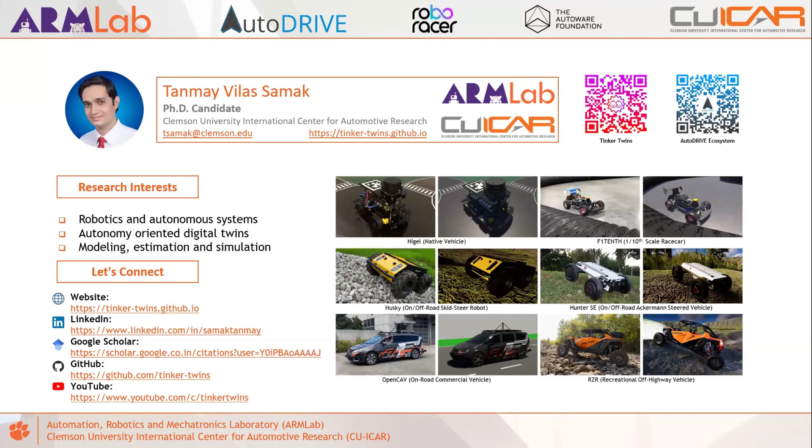Our PhD research is targeting digital twins, no pun intended, where I am focusing on the real to sim aspect. Whatever is in the real world, how do you model it, estimate, and then bring it in simulation reliably? And Chinmay is working on the other side of the coin to ensure whatever works in simulation can be transferred with guarantees back to the real world.

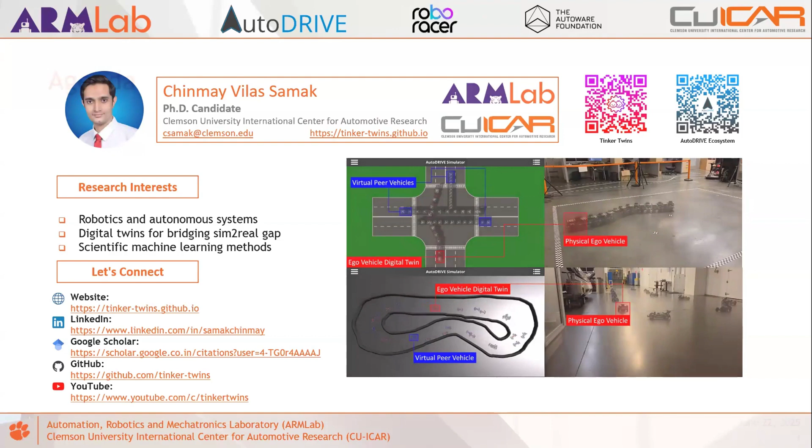So in today's agenda, we'll be first going over the introduction of what AutoDRIVE ecosystem is and how it enables research and education. We'll be then talking about some exciting competitions realized by AutoDRIVE. Most of the talking today will be about AutoDRIVE AutoWare integration, where we'll be highlighting some of the key aspects and demos that we have curated. Followed by that, we'll have a step-by-step tutorial on how you can get started with AutoDRIVE and AutoWare today. And then at the end, we have some exciting unveiling to do. I won't, of course, talk about it now to save the fun for the last.

You have different vehicles. These can be physical vehicles as depicted in the first and third column of the picture in the top left, or they could be the digital twins of the same that is depicted in the second and fourth column. So we have different scales and operational design domains that AutoDRIVE can support. So for example, you have small scale vehicles like Nigel, which is the native vehicle of AutoDRIVE, as well as F1TENTH, both of these being open source.

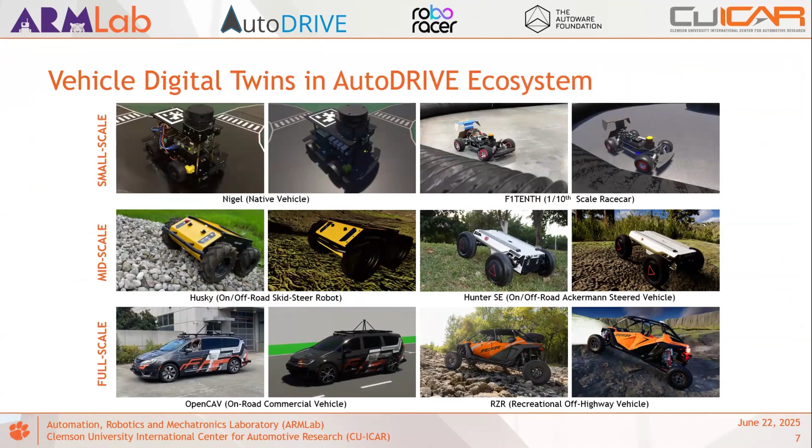So here is a glimpse of, or a zoomed in version of, the different digital twins that AutoDRIVE supports. And here you can see them in action, where you have the different scales of vehicle dynamics being simulated differently for each vehicle. Now, for example, small scale vehicles generally have very basic powertrain components, a motor connected by some gears directly to the wheels. But as you go towards full scale vehicles, you have very detailed powertrains. The same applies to other aspects of vehicle dynamics like the suspension geometry and things as such.

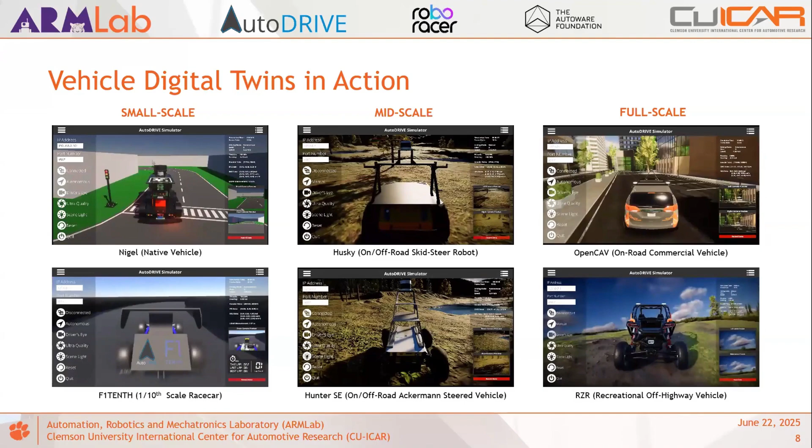Apart from that, the sensor suite also changes. So on the smaller scale vehicles, you have sensors that are typically hobby grade or general purpose academic grade sensors. But as you move to mid scale robots, you now have a mix of both hobby grade sensors as well as industry grade sensors. But typically, when you translate to full scale vehicles, you now have the complete sensor suite comprised of industrial grade components. And these now have been replicated to the digital twins so that the development of algorithms can be targeted accordingly.

Coming to environment digital twins, again, here is a zoomed in version of the different environments that I just discussed. So we have different synthetically constructed environments for small scale vehicles, typically like boxes or vinyl stickers, or in the case of F1TENTH or RoboRacer racetracks, the air ducts. One of the environments, the tiny town, is something that we have kept for benchmarking across different scales. And it is basically the scaled up or down version of the same environment across the different scales that you see. Apart from that, yes, you have different mid-scale as well as full-scale environments.

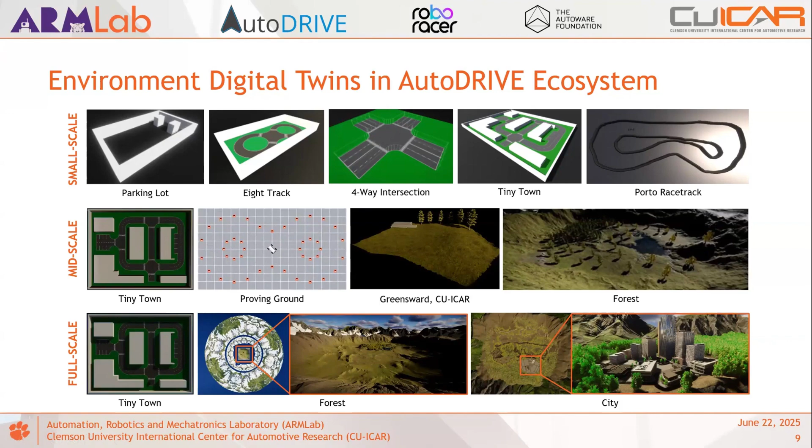Full-scale environments are typically more diverse in terms of their features so that users can target different styles of autonomous driving or different applications of autonomous driving in general. But static environments are themselves not enough. So we have, of course, the option of introducing variability in terms of dynamically changing the times of the day, the weather conditions, or other aspects of the scenario.

What you see on the right video is basically a test matrix that procedurally generates and simulates different times of the day. So the top two rows here are going from dawn to dusk to midnight. And the bottom two rows are showing the different procedurally generated weather effects from clear skies to overcast, foggy weather, rain, as well as snowfall.

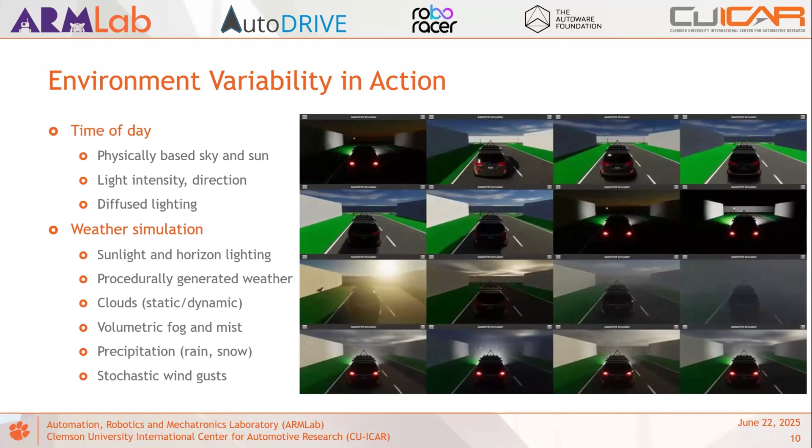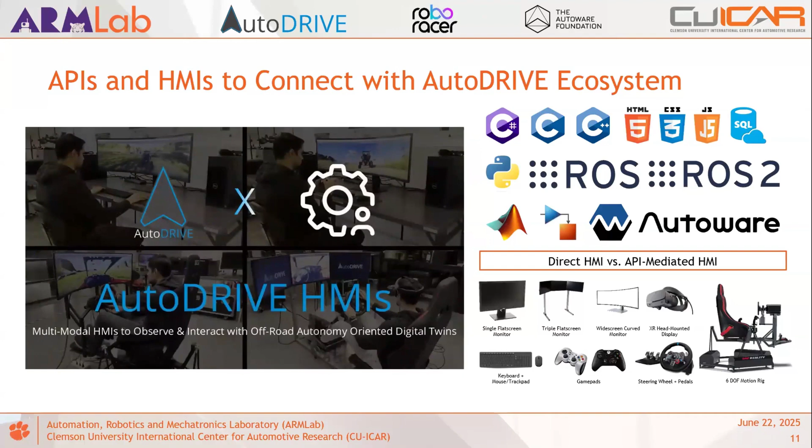But simulating alone is not sufficient. So you, of course, have the most critical aspect of connecting the digital twin ecosystem with a development framework. And that's what the APIs and HMIs are for. APIs are typically targeted towards autonomous driving applications where, as you see, we have a different suite of APIs that we support. And these will be primarily used for developing the autonomous driving algorithms and interfacing them in real time with the simulator. HMIs are primarily targeted for human in the loop testing and development.

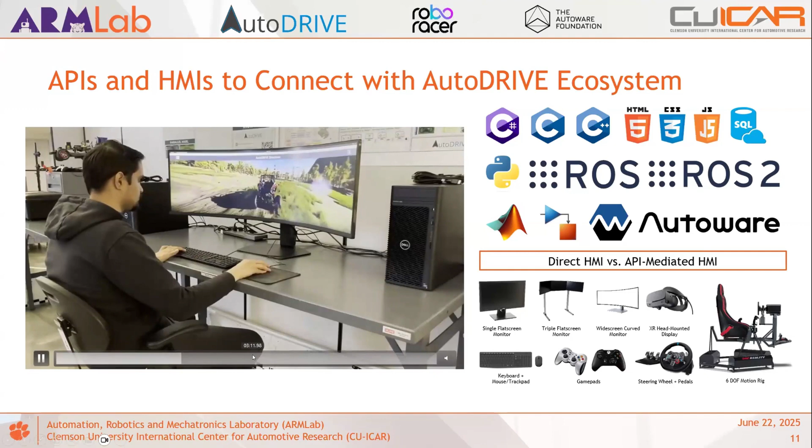And this can be now mixed and matched as well so as to create a mix of autonomous driving and manually driving aided scenarios where you have mixed traffic participants, enabling research or development in those operational design domains.

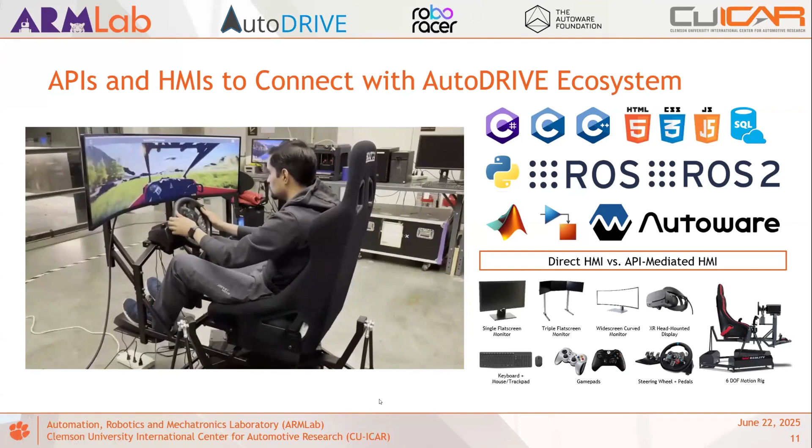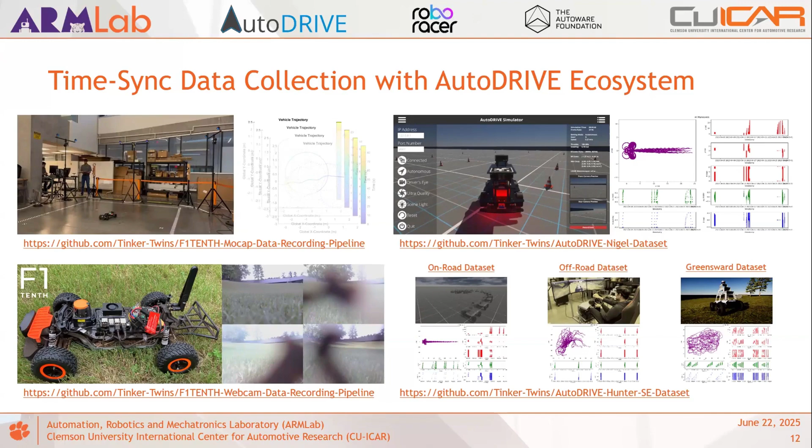Apart from that, we have also released a few data sets using the AutoDRIVE ecosystem. These are both from the real world as well as the digital twin of the same vehicles. And the one thing that I would like to highlight here is that all of these have been time synchronized from a data generation perspective so that not only perception data, but the dynamics data of the vehicles is also usable and could lead to, say, for example, deriving surrogate models for different motion planning applications or even control synthesis.

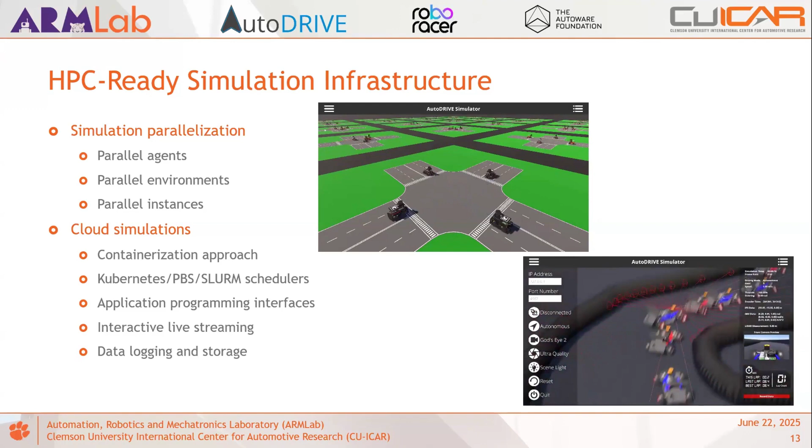One of the key aspects of digital twins is being able to accelerate them, and that's what is supported through the HPC-ready simulation infrastructure, where we have different ways of parallelization. Some of them are, as you see, agent parallelization and environment parallelization, where, for example, you could parallelize different environments or agents and isolate them from each other and then scale those deployments.

But apart from that, you also have instance parallelization, where you could spawn multiple instances of the simulation itself, which typically isolates the different variables and vehicle dynamics aspects. And these could be, for example, done in different ways. So here, for example, we have one of the works where we used Docker containers and Kubernetes orchestration using the Rancher cluster to orchestrate parallelized simulation workloads within cloud infrastructure.

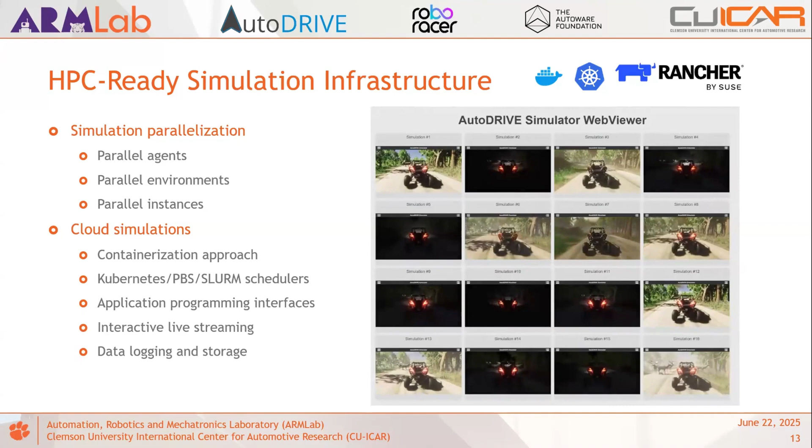And here is another representative use case where instead of using Rancher, we now adopted our university's Palmetto cluster using Apptainer as the means of containerization. And here we could now scale the deployments significantly from just 16 parallel instances all the way up to 32 or even 128 parallel instances.

Coming back to digital twins, here we are showing how one could use AutoDRIVE ecosystem to immerse physical full-scale vehicles in the loop with their digital twins, and support different scales of immersion of the physical vehicle within the digital space.

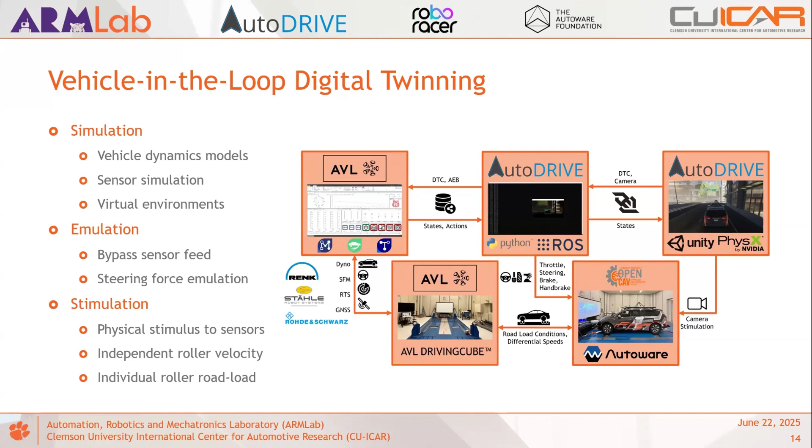So here is a quick glimpse of how it looks. Again, to reiterate, for example, we have the projectors mounted on the windshield of the vehicle that's projecting live feed from the digital space in the front of the vehicle. The physical cameras on board the vehicle are capturing the projected feed and making the autonomous driving algorithm think as if it's immersed in the digital space.

The physical vehicle is then controlled using the autonomous driving software stack that's running on board the physical vehicle. Here, for example, we are using Autoware as the validation stack for our experiments, and running a test case of autonomous emergency braking. And as you see, the physical control commands are being relayed in the real world, and the chassis dyno is now making the measurements to feed and close the loop with the digital twin of the vehicle to update the vehicle dynamics within the simulation space. And that now closes the loop to update the projection feed in front of the vehicle.

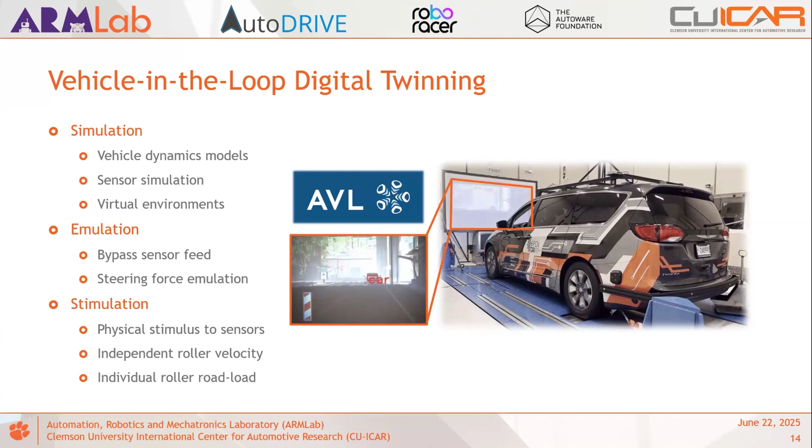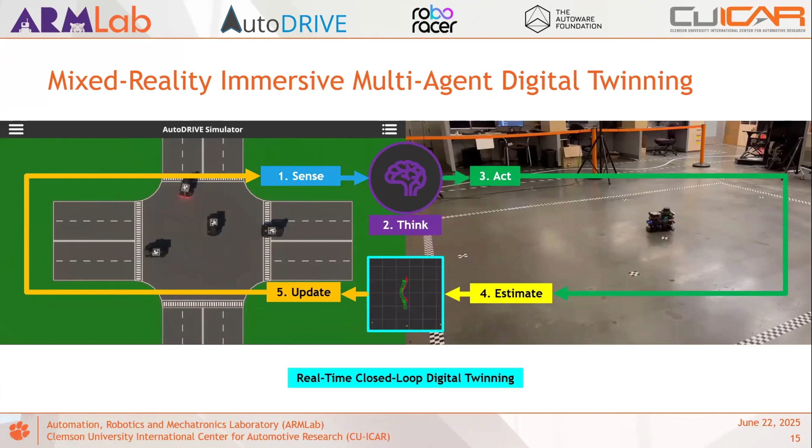But this is just single agent vehicle-in-the-loop digital twinning. You can now also start exploring interesting use cases from a multi-agent digital twinning perspective, and not just pure digital twinning, but mixed reality digital twinning, where, for example, what you see here is only one physical vehicle running in the environment compared to three peer agents and a virtual scenario set up within the digital space that now synchronously performs a multi-agent intersection traversal task. And you can, of course, scale these across different ODDs and operational scales.

So for example, in the matrix that you see here, the first row represents the test bed, which is the real world. You can have one or more vehicles in the real world, depending on the use case. The state estimation from these is now being done using the dev kit, where, for example, you have onboard state estimation algorithms from small scale vehicles, such as LiDAR-based range flow odometry, inertial encoder odometry, as well as full factorial 3D point cloud based localization that's now estimating different states of the vehicle. And then these states are being updated within the digital space to synchronize their digital twins within the virtual environments.

And you, for example, have three different use cases. First, for intersection traversal, where you have three other agents co-participating within the same virtual environment. You have an autonomous racing use case where a digital entity of a RoboRacer vehicle that's completely virtual is immersed in the loop with the physical vehicle that you see above.

And finally, for OpenCAV, you have a jump scare scenario where a virtual vehicle is cutting in front of it without any warning, and the digital twin has to sense it and then relay the same action commands within the physical space to make sure that the emergency braking is not only happening from the perception side, but actually even within the real world, you have the full factorial test plan that now makes sure that the braking distance is safe and optimum.

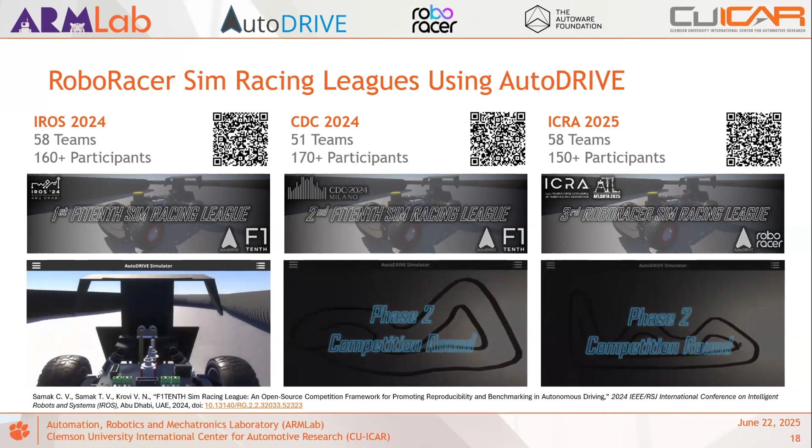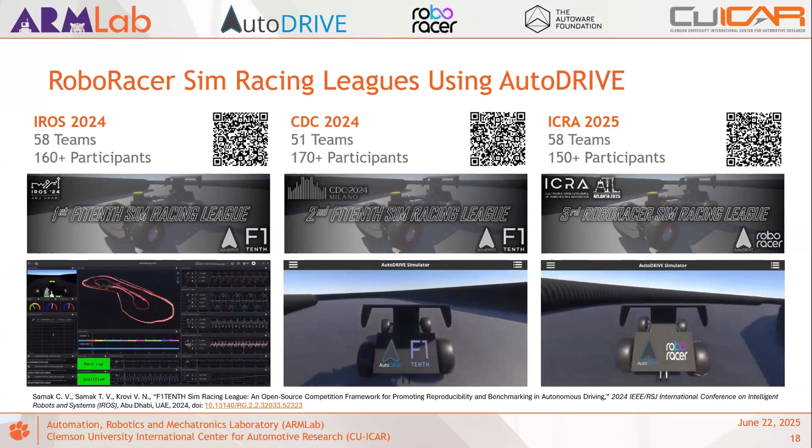So the sim racing leagues were typically held a week ahead of the actual conference so that the teams could participate in the sim racing leagues ahead of time and then go to the conference and participate in the physical racing league. And we also saw some really interesting algorithms as well as the sim to real transition of those aided by the digital twins to win the physical competitions as well.

So here is a typical representation of the participation response that we got. Specifically for ICRA 2025, which was the most recent competition held, we saw participation from over 150 people across 58 different teams representing 32 different organizations, at a global scale spanning over 25 countries. So it, in a way, validated the practicality and scalability of the competition deployments.

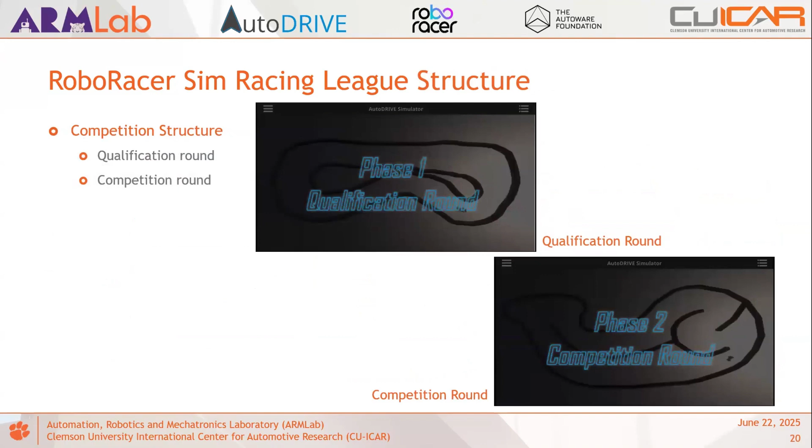But what is more important here is firstly to understand the competition structure. The structure here is what we believe helped us scale this to such a level. We divided the competition in two different phases. One was the qualification round, wherein we released Dockerized environments for the simulator as well as DevKit to all the teams approximately a month ahead of time.

And there was a set deadline for all the teams to submit their solutions for autonomous racing, which were then going to be evaluated for their ability to continuously run multiple laps around the track. And the only objective here was to be as safe as possible. So safety was most critical, performance was secondary.

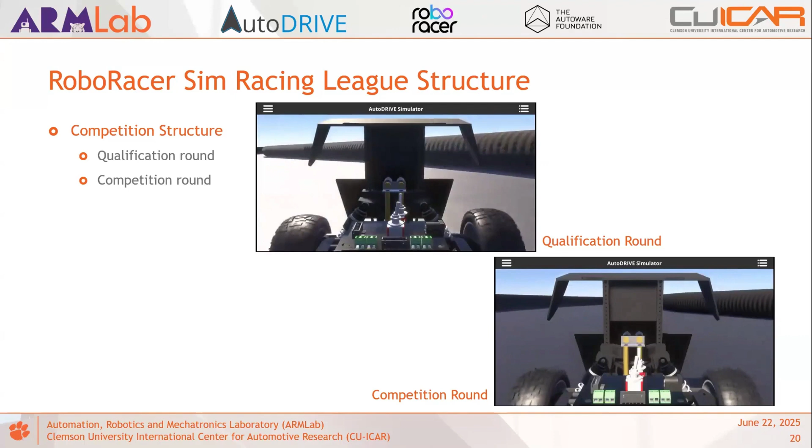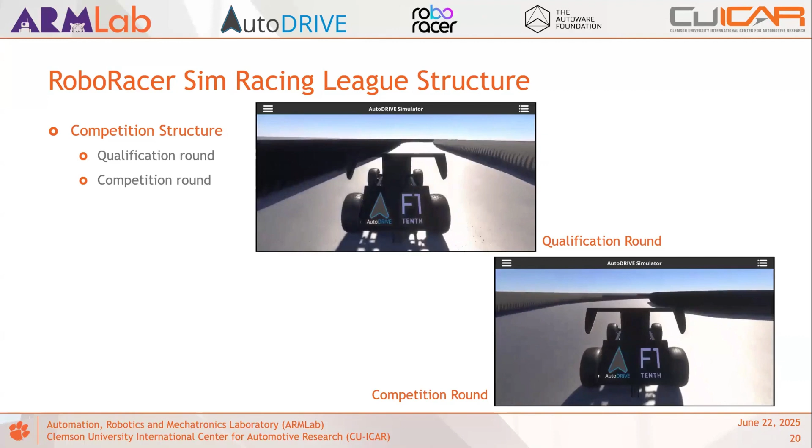But then in the competition round, just a few days ahead of the final deadline, we switched the track with another one, and we expected all the teams to slightly modify their algorithms or tune them for the new racetrack. And their algorithm should have already been robust enough to handle track changes and other changes in the environment. So here is how the competition framework looks.

What we have essentially adopted here as a best practice is containerization, in which we offer every team the containerized instance of the simulator as well as dev kit. And their job is to just work on this small aspect of developing their own package or packages that can interface with the AutoDRIVE API to communicate back and forth.

And the primary modality that we used for deploying these competitions is ROS2, which is directly scalable to the AutoWare stack. And so some of the teams have also started to use the AutoWare stack to develop their autonomous racing algorithms and have performed really well in the competition.

The other aspect in terms of global scaling is to understand that not everyone would have computational resources that are state of the art. So we offered the teams the option of distributed computing as well as GUI versus headless modes of computing to more efficiently develop their algorithms, and whatever solutions they could submit were still valid when we deployed and executed them.

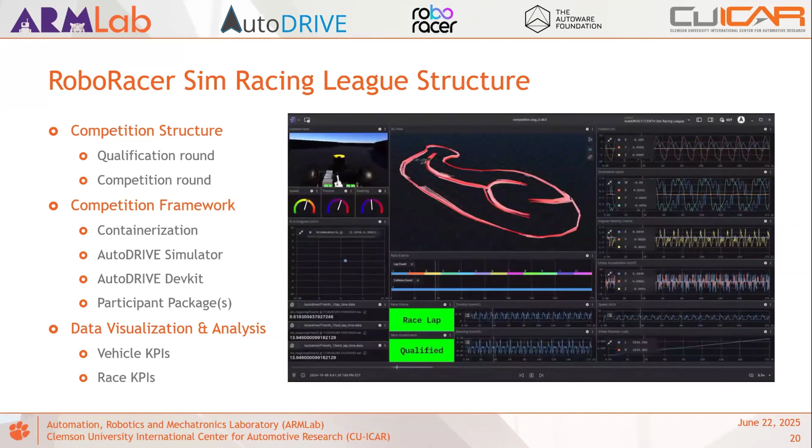The final aspect of this competition was to be able to transparently record all the key performance indicators for the vehicles as well as the race in general and provide this data back to the teams. And in addition to that, we now also have the capability to analyze this data, which is pretty detailed in terms of all of these different KPIs, as well as comment on the reproducibility and benchmarking aspects of the simulation and the testing of different autonomous racing or driving algorithms in general.

So with that introduction and overview of the AutoDRIVE ecosystem and its applications, let us now move to the specific topic of interest, which is its integration with the AutoWare stack.

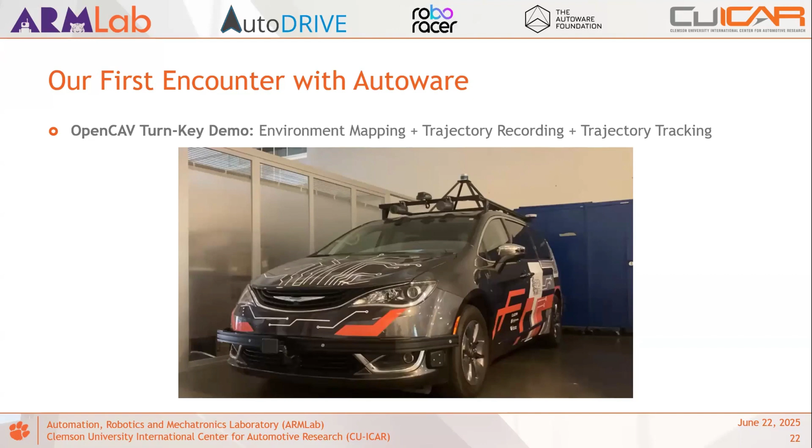The main reason or motivation we had for doing this was our first encounter with the Autoware stack when we started our PhD at CU-ICAR. We encountered this vehicle that is part of our lab, the Open Connected and Automated Vehicle, or OpenCAV. It is basically a Chrysler Pacifica retrofitted with sensors, drive-by-wire, and onboard compute, which can enable autonomous navigation.

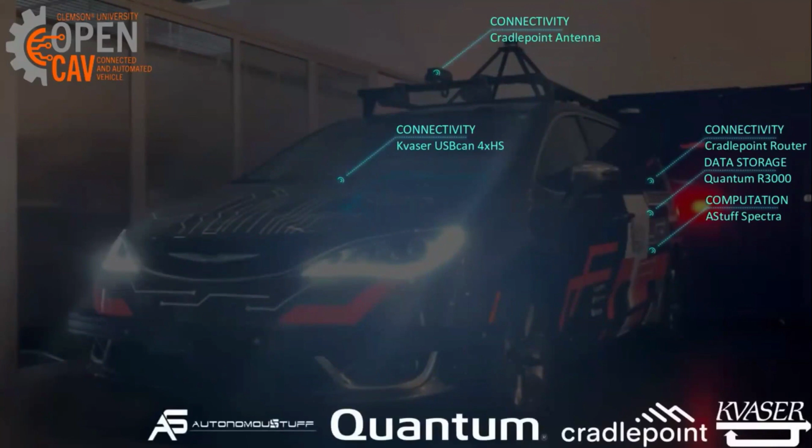Throughout the campus, we already have a pre-computed map of the campus environment, and we can use that map for localization. Once we have the localization estimates, we can then drive this vehicle around from point A to point B in the campus and record that trajectory, or do an online or offline trajectory planning to navigate from one point in campus to the other.

And with that plan, what we can do is offer autonomous shuttle rides for people from one point in the campus to another. So what you see currently in action in the video is the capability of the vehicle running the Autoware stack to map the environment, then generate the trajectory, and then track that trajectory in real time, all autonomously to navigate from one point on campus to the other.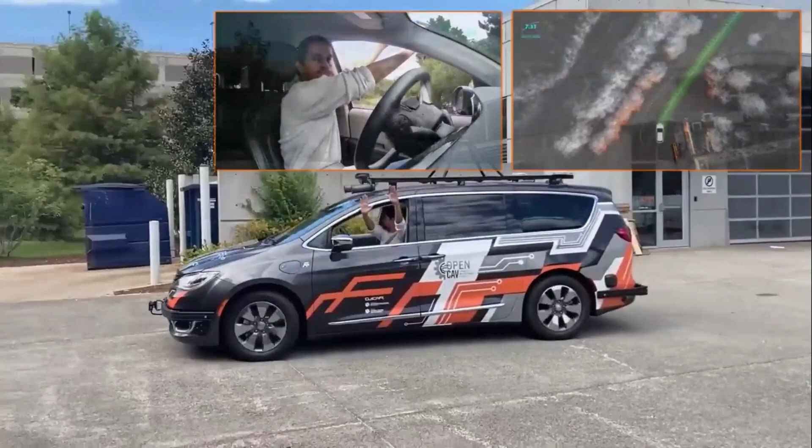But most critically, the deployment from simulation to reality should not have any changes, either in terms of the algorithm or even in terms of the interfaces. For example, the topics that the Autoware stack is publishing on, or the sensor streams, or other hardware-software integration aspects. And that's what was the key motivation, which firstly required a high fidelity digital twin of the OpenCAV, and secondly required the API for AutoDRIVE and Autoware to be integrated harmoniously so that the deployments from simulation to reality became seamless and zero shot.

Finally, once we had this working for the OpenCAV vehicle, we wanted to now have a uniform or unified pipeline or framework that can support deployment of a common autonomy stack such as Autoware across all the different scales and operational design domains of autonomous vehicles that we typically encounter during our research.

So as a result, with all the different digital twins that we have, we created a corresponding Autoware API for them so that they can be interfaced with the Autoware stack across small, mid, and full scale, while targeting different operational design domains like on-road navigation, autonomous racing, as well as off-road navigation.

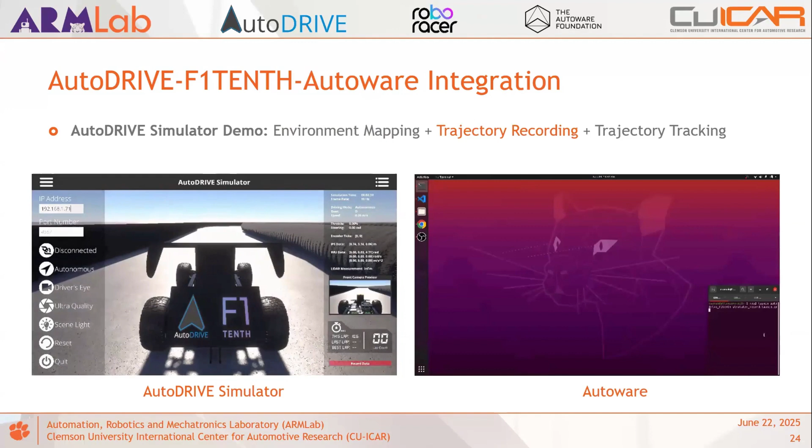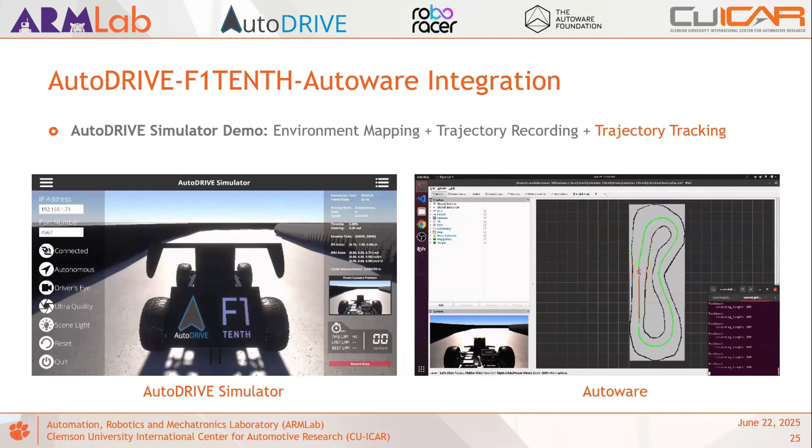So once we have the entire trajectory plan or an optimal race line, what we can do is use the Autoware stack to now command the vehicle to track that trajectory autonomously, while localizing with respect to the map in real time. One aspect with respect to this operational design domain is that we are not just navigating from one point to the other.

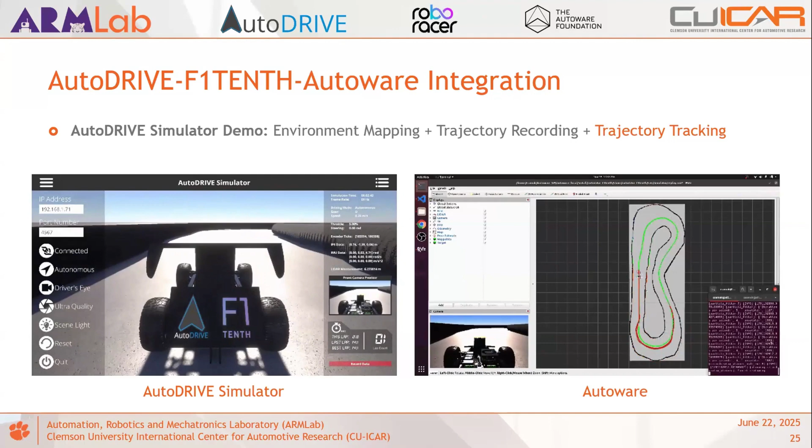We need a continuous way of completing multiple laps around the racetrack. So what we need to do is keep track of our pose estimate and not just stop at the endpoint of the trajectory, but also try to complete an entire loop multiple times, which is required, for example, in a time attack race where you have multiple flying laps to register the fastest speed.

With that deployment in the simulation, we also evaluated it in the real world. Again, to highlight, this is a zero-shot sim-to-real transfer, meaning we have not changed or tuned any perception parameters, like, for example, the LiDAR covariance matrices or any other aspects of the localization algorithm.

And we have not even tuned any of the control parameters like the vehicle control commands or controller gains. All of the things that you see are being transferred zero shot with the same parameters that they were simulated in.

One more thing that you can observe here is that we have a completely different track between simulation and real world, but the pipeline still should work. It is working in the real world without any modifications to the parameters.

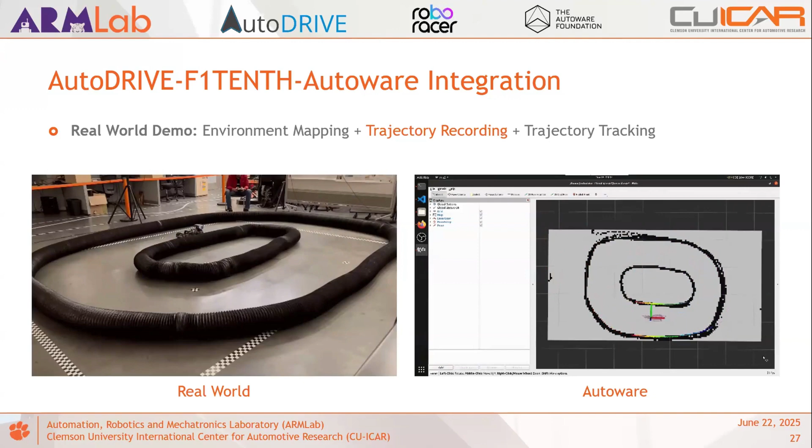So again, the second step was that of recording the trajectory. And finally, here we have the pre-recorded trajectory being loaded, the vehicle being localized within the map, and then driving autonomously using the Autoware stack.

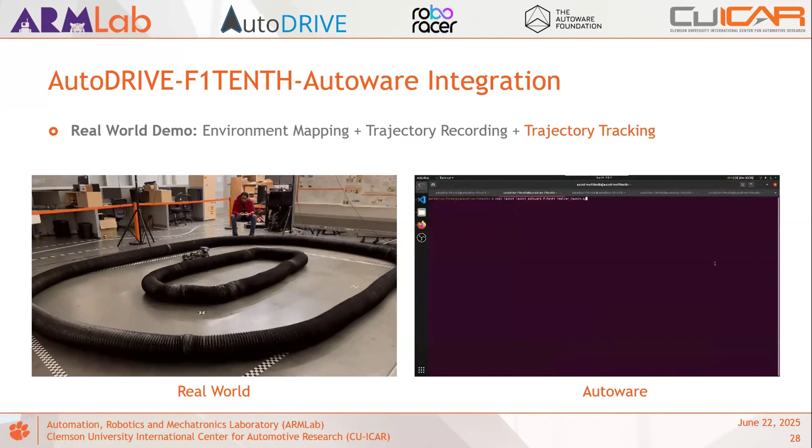And one more small thing here is everything's running on board the physical vehicle. In the simulator, of course, you can use a high-end PC to deploy your stack and the simulator on, but the idea is that all of these software stacks should be edge deployable, and that's what you see on the physical vehicle, where we are using the onboard computer for the RoboRacer to deploy the Autoware stack.

Now coming to the second vehicle, which is Nigel. Here we devised a slightly different example because the operational design domain that this vehicle targets is that of on-road autonomous navigation. So first of all, what we are doing is just exploring the environment and creating a map out of it, which will then be used for the trajectory generation, localization, and motion control task.

Once we have the map, we can move forward with trajectory recording. And here what we are essentially doing is recording the localization estimates of the vehicle and driving it from the spawn location to one of the designated parking lots. So this application is essentially demonstrating an autonomous parking application.

And once we have that plan, either via a pre-recorded example or by a motion planning strategy, we can then engage the vehicle in autonomous mode to navigate from the spawn location all the way up to the designated parking lot.

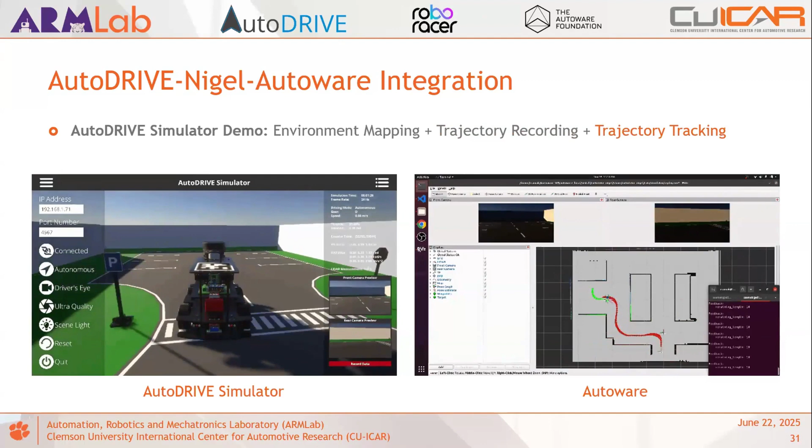And similarly, as with the RoboRacer vehicle, we were exactly able to deploy this in the real world, zero shot, without modifying any perception or control parameters. So here, for example, you see the real world mapping in action, followed by recording the trajectory from the spawn point to the designated parking lot.

And then finally asking the vehicle to do the same autonomously in real time using the Autoware stack that's deployed on the physical vehicle.

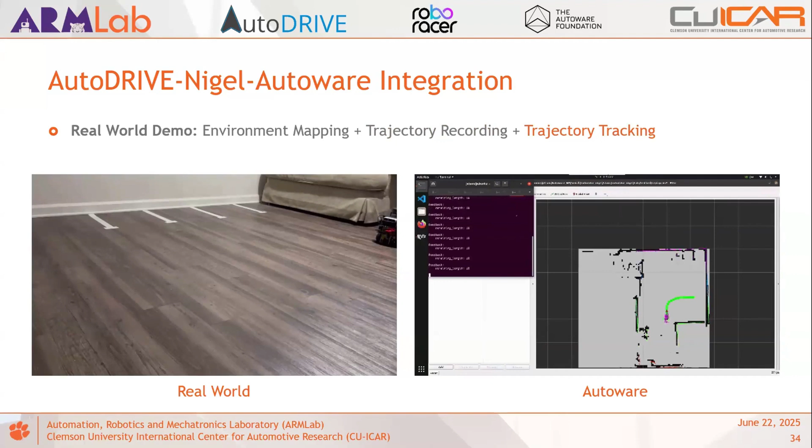So these were some of the small scale deployments. Next, we move to mid-scale vehicles, for example, the Hunter SE by AgileX.

Here again, we are mapping the environment, but this time we are using a different approach. So as you see in the simulation, we have a 3D LiDAR that's mounted on the robot, but we are using only a 2D slice of the 3D point cloud to actually create a 2D occupancy grid map. And the reason that we are doing this was to analyze the effect of environment representation in terms of mapping.

Since you have a simplistic environment which can be typically captured in a 2D plane representation, such as the 2D occupancy grid map, we wanted to see if that was enough for the vehicle to be navigated from point A to point B and park autonomously, similar to Nigel, what you saw earlier, or was it truly necessary to have a 3D map?

And turns out you typically don't need a 3D map unless the environment is very complex and you have different objects that are either lower or higher than the 2D slice that you are capturing.

So here with the 2D map, we are now localizing the vehicle and driving it from the spawn to the targeted parking lot, while recording the trajectory so that the autonomous driving algorithm can now move the vehicle much the same way from the spawn point to the designated parking area, but autonomously using the Autoware stack.

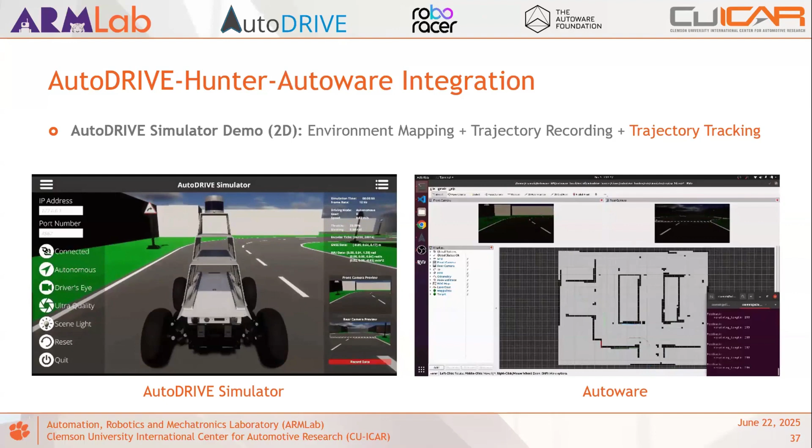Once we have this working in simulation, we could transfer this similarly to the real world. But what's more interesting is to deploy this in a much more complex ODD, such as off-road driving. That's what we typically explored in this use case, where you have a very detailed off-road environment full of ridges, trees, even a pond in the center of the map.

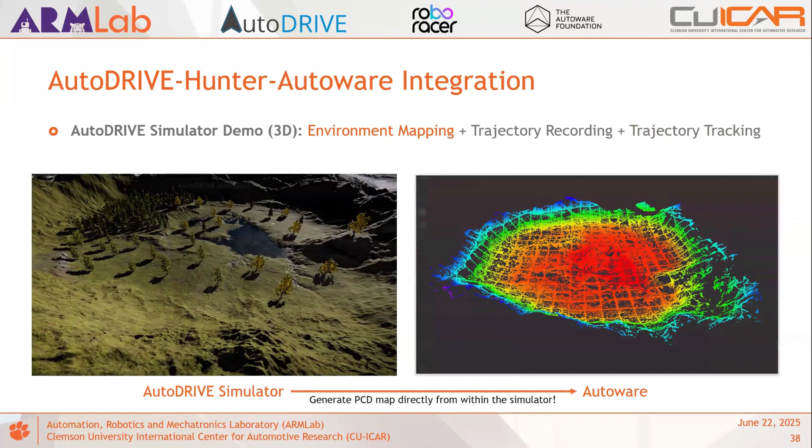We use AutoDRIVE Simulator to directly create a point cloud map from the ground truth sensor simulation within the simulator. Of course, you can use the Autoware stack to do the same, but here we're just demonstrating one of the advantages of digital twins. What you can do is directly start from the trajectory recording phase rather than investing your time in mapping. As long as you know that the digital twin you have is in fact a true representation of the physical deployment you have in mind, this should work out of the box.

Here you can see the trajectory recording in action, where we are teleoperating the vehicle from the spawn location to a designated point in the environment, which if traversed linearly would go through the pond.

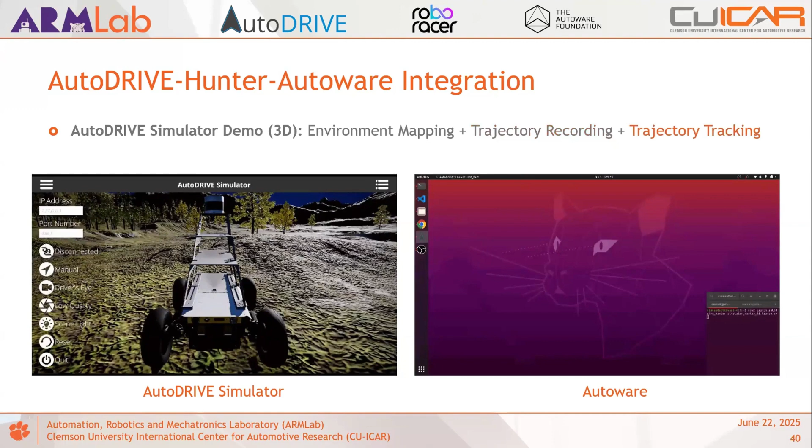Finally, we are then asking the Autoware stack to try to navigate the off-road environment autonomously. This is basically expanding the operational design domain of the Autoware stack, which has been pretty much explored in on-road driving conditions, to off-road now, enabling off-road navigation in an end-to-end setting in this simple, cutesy example or demo that you're seeing.

Of course, this can now be complexified in terms of both the environment and the vehicle, but more importantly, also leveraging other aspects of the Autoware stack - different object detection, localization, or control methods that Autoware offers - to come up with more and more efficient means of traversing the off-road operational design domain.

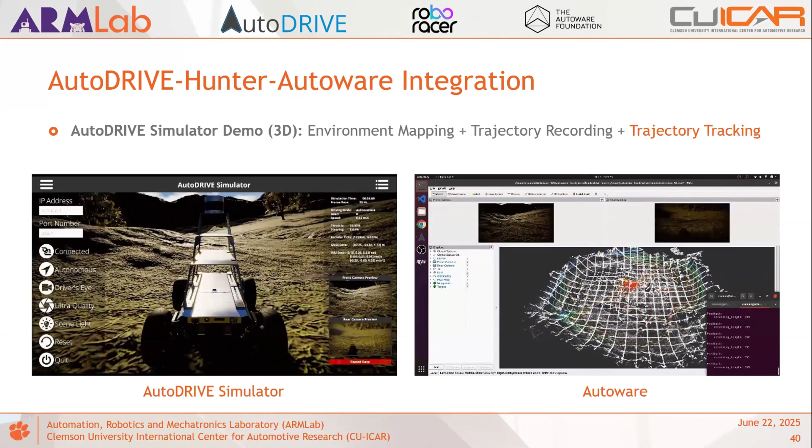And storing those maps now becomes difficult. If you keep using the same resolution, the scale of a full scale environment will typically limit the storage size of the map, or even onboard computation if that's happening in real time to create the map in the first place. That is something you have to be mindful of while devising your algorithms. And so changing the resolution, changing the scale of the map becomes important.

Next, you have the same way of generating the trajectory from point A to point B. Again, because OpenCAV is representing an on-road commercial vehicle, we are targeting the autonomous parking operational design domain, where the vehicle is taken from its spawn location to a designated parking spot, and then asking the Autoware stack to do this autonomously using the 2D map in this case.

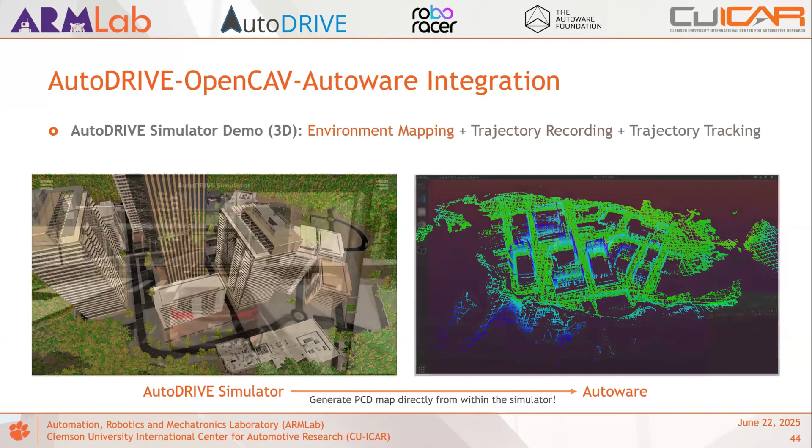Both in the case of the 2D navigation example just shown, as well as the more realistic demonstration of the same application in a downtown-like scenario, we start off by constructing a 3D representation of the point cloud data and use that for recording the trajectory based on the localization estimates of the vehicle. It's now starting to become a bit noisy because of the complicated representation of the environment.

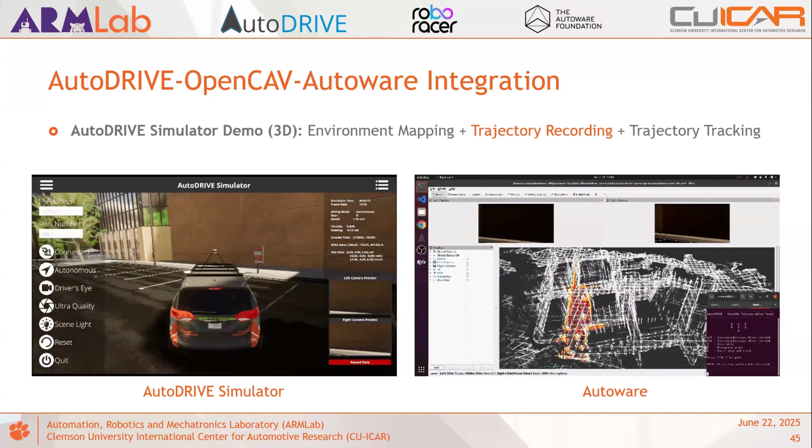And even the roads here are not completely flat, so it kind of brings the powertrain dynamics of the vehicle into play, where you have transmission upshifts and downshifts depending on the gradient of the road, and that plays a crucial role in ensuring whether your algorithms can be scaled to the real world or not, because the physical vehicle would have those effects in reality.

And finally, here as well, you are seeing the Autoware stack completely controlling the digital twin of OpenCAV fully autonomously to take it from the spawn location and drive it all the way across the road, across the intersection, and then into the parking space, and then parking it autonomously within the designated parking lot.

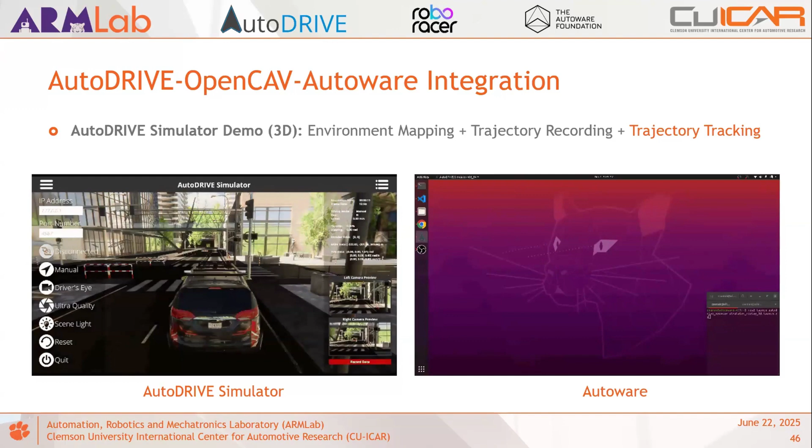And finally, as we demonstrated earlier, the algorithms that have been developed or fine-tuned in simulation or with respect to the digital twins alone can be deployed into the real world directly, or using a mixed reality digital twin interface, or even with vehicle-in-the-loop setups such as the AVL driving cube.

So all the different examples that we showed earlier have all been open sourced, and we have a dedicated GitHub repository as well as a complete YouTube playlist that guides step by step through all of these different examples as well as the general interface of AutoDRIVE with respect to Autoware.

So for example, the first video in here is demonstrating the high level interface of the repository with documentation for each and every vehicle and instructions for deploying this either with the digital twin or in the real world. And the second video is an example of one single vehicle, in this case OpenCAV, to demonstrate the documentation of the entire example and workflow that one can follow to recreate or replicate the results.

But the map-based autonomous navigation examples that we just showed across the different scales or ODDs are just the beginning, and this integration can enable more complicated approaches to be deployed with AutoDRIVE and Autoware. And we hope that this stepping stone serves as a starting point for us to now explore some of these challenging problems in the space of autonomous driving or racing.

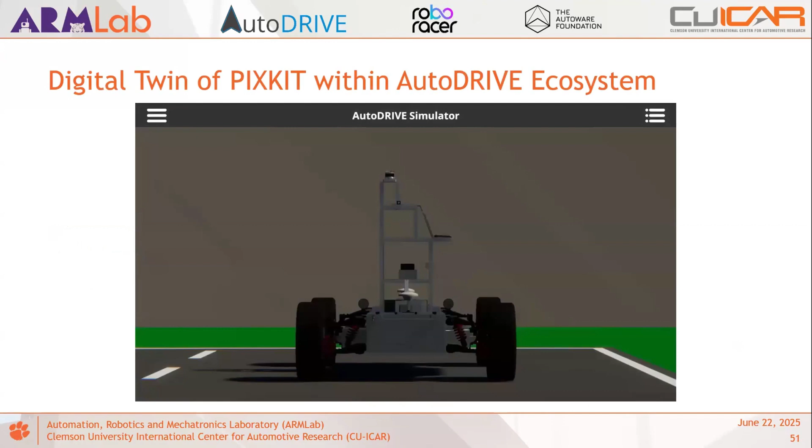Now for the exciting part. Today we are unveiling a new digital twin that will be released in AutoDRIVE soon. And that is the digital twin of one of the very famous platforms that Autoware supports, which is the PixKit. So here you have a complete digital representation of the PixKit, which is calibrated from the real PixKit that we have in our lab, both in terms of its high fidelity vehicle dynamics and sensor physics that you see in action, as well as the different interfaces and data that come in and out of the vehicle.

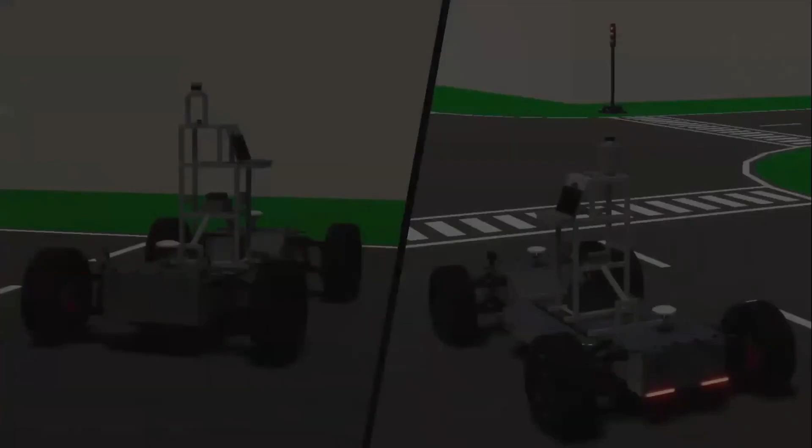You also have different lights and indicators being simulated, which is something that the Autoware stack is fully compatible with, and can now not only be useful for developing or designing autonomous driving algorithms, but also for smartly signaling other traffic participants, including humans or other autonomous vehicles, to relay the intentions of the ego vehicle.

And finally, here is just a glimpse of the digital twin in action, where we are just driving it across the tiny town benchmark environment. But again, this is just the beginning, and you could put the same PixKit in any other environment. You could even recreate, as I said, using real world data. We have pipelines to recreate physical environments pretty quickly, which can enable you to virtually prototype your algorithms for the task that you have at hand.